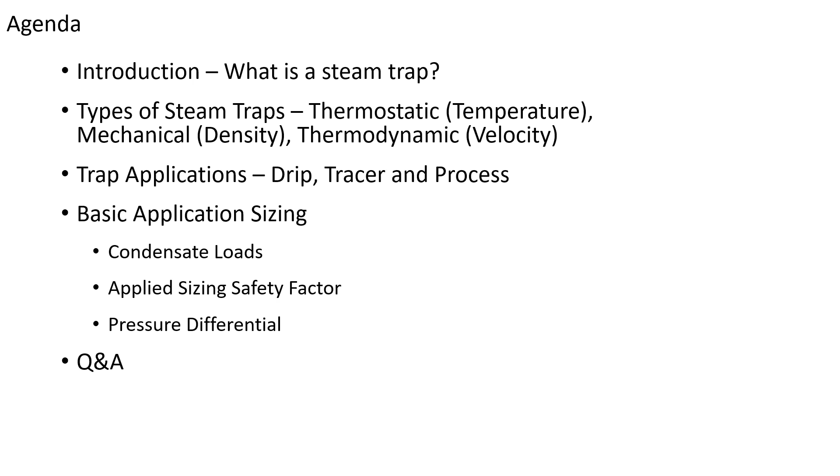The three common applications you'll find in industrial facilities are what we call drip, tracer, and process applications. Then within each area of that steam system—the drip, the tracer, and the process—we'll look a little bit at sizing. And then we're going to save some time at the end for question and answers.

Okay, so in a steam system, you might expect there to be just steam in the pipe, but actually there's several fluids and byproducts that have to be addressed. Obviously, steam is the main fluid you want in your piping network and process. It is the heating medium that has the largest amount of heat per pound mass of various utility fluids, so it's desirable to have that steam space occupied only by steam to be most efficient.

But as a byproduct of a steam system, you're also going to have condensate, which is just the steam that has given up its latent heat and condensed back into a liquid phase. That condensate is a valuable byproduct though. It still retains some energy in terms of sensible heat, and it is basically chemically treated and slightly purified water. So as a byproduct, you want to recycle that back to the boiler as best you can. The most efficient steam systems will have as close to 100% condensate return as they possibly can. That's never a perfect scenario, but it's something to strive for.

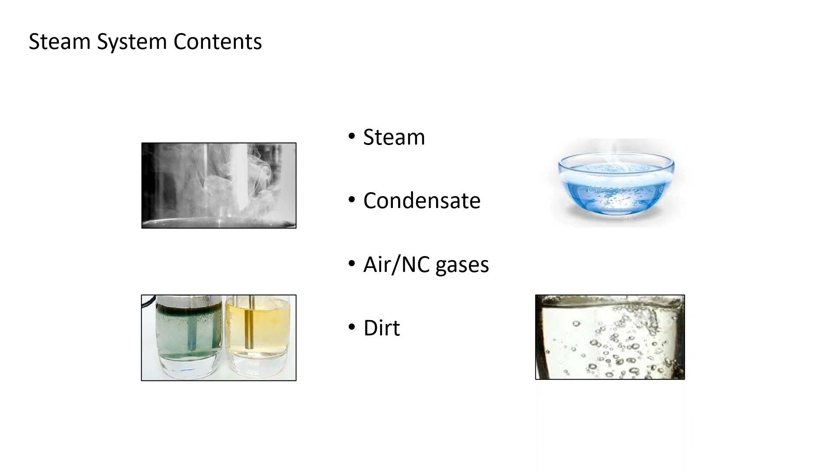But as far as the steam trap goes, you really have to think of it as nothing more than an automatic valve. And the automatic valve has to work based on positive pressure drop. There's some misconceptions in the marketplace that one particular type of trap by its operation will push condensate better than another. Really, all traps will push condensate. It's just dependent on the inlet pressure to the steam trap being higher than the outlet pressure outside of the steam trap. As long as that positive pressure differential exists, condensate will flow.

In a steam system, compared to, let's say, a hydronic system, you don't always have that positive differential, as we'll see. So that automatic valve in the steam trap differentiates between steam and condensate, and steam and non-condensable gases. It'll do that based on temperature differences, density differences between a gas and a liquid, or velocity. The speed with which a fluid will flow through a pipe or orifice will vary depending on whether it's a gas, which would be higher velocity, or a liquid, which would tend to be slower velocity.

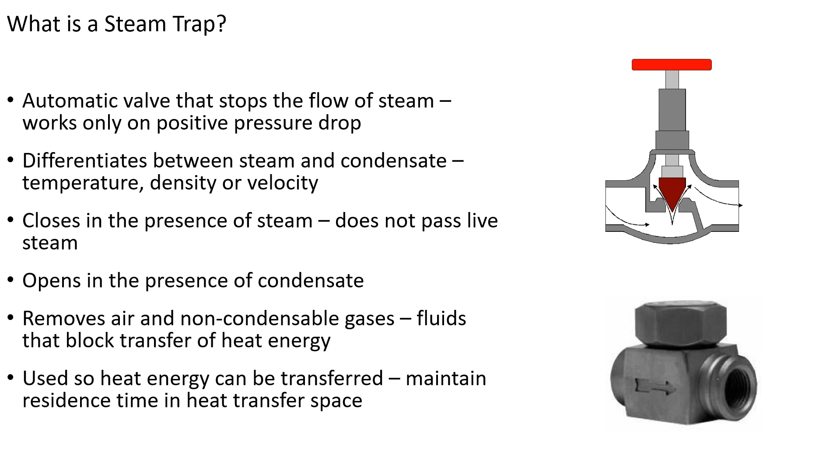The broad categories I mentioned earlier: a thermostatic steam trap operates on a temperature difference. Mechanical types of traps work on a density or level control type of difference between steam and condensate. And thermodynamic is a broad term covering many different types of traps, like impulse traps, but they're all basically working on a velocity principle. We'll look at that in further detail.

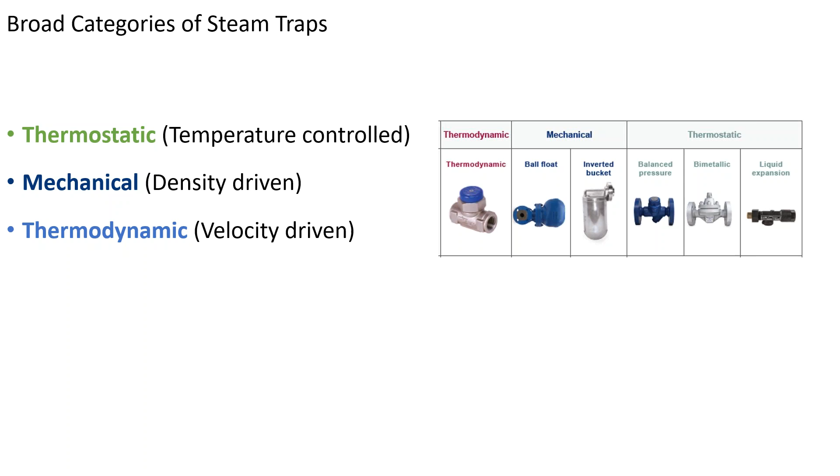We're going to start off with the thermostatic trap. It's probably one of the earliest types of traps ever manufactured, back in the late 1800s, early 1900s. These thermostatic traps work on the temperature difference between steam as a gas and condensate as a liquid.

Everyone knows that the saturated steam curve will give you, for any given steam pressure, a corresponding steam temperature. Directly at condensation, the condensate and the live steam occupying the same space will have that same temperature. So these traps, in order to hold back live steam, have to be able to sense a slightly lower temperature and operate at a slightly lower temperature than the saturation steam curve.

They do that by either a capsule, a bellows fill, or bimetal plates, which is over here on the bimetallic trap. All of those will sense a temperature cooler than live steam and will tend to close the trap off prior to reaching that live steam temperature.

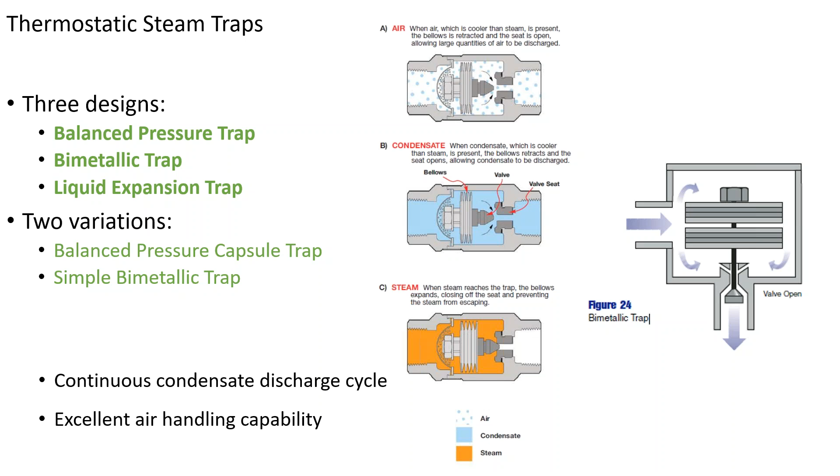Liquid expansion is just one of the specialty types of traps in the thermostatic family. In this case, there's a liquid-filled bellows, but that's on the downstream side of the valve head and seat assembly, and that thermostatic bellows is exposed to atmospheric temperature. So this type of trap will only operate at or below 212 degrees, so you'd expect it to back up a fair amount of condensate into the system. But that's okay, especially if you're looking for a crude type of temperature control device.

Let's say you have an outdoor storage tank filled with water, maybe a fire protection tank, and you just want a steam coil in the bottom to keep it from freezing. This type of trap can be set to discharge condensate at, say, 150 degrees or 120 degrees, giving you a crude form of temperature control on the storage tank to keep it from freezing. It has all the same characteristics as other thermostatic traps—wide open on startup, venting air, non-condensables, and cold condensate freely.

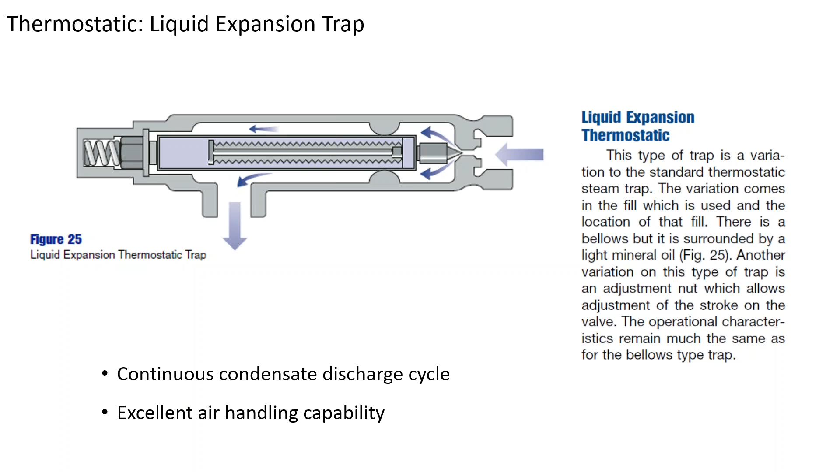I talked about the saturated steam curve, and this is the relationship you need to understand with thermostatic traps: they will always operate at some temperature below saturation. So condensate will be discharging somewhere below the saturated steam curve, and therefore backing up some condensate towards the system. The actual delta T will vary by trap manufacturer.

Some manufacturers use what they call a near-to-steam temperature profile, which is, for the most part, primarily distilled water inside a capsule. That gives it a boiling point very close to your live steam temperature, so it tends to back up less condensate. In other cases, they'll use an alcohol and water blend, which will drop that 212 degree boiling point at atmospheric pressure down to maybe 20 or 30 degrees below any given saturation temperature. Again, that's not necessarily a bad thing as long as you understand that's how the trap operates.

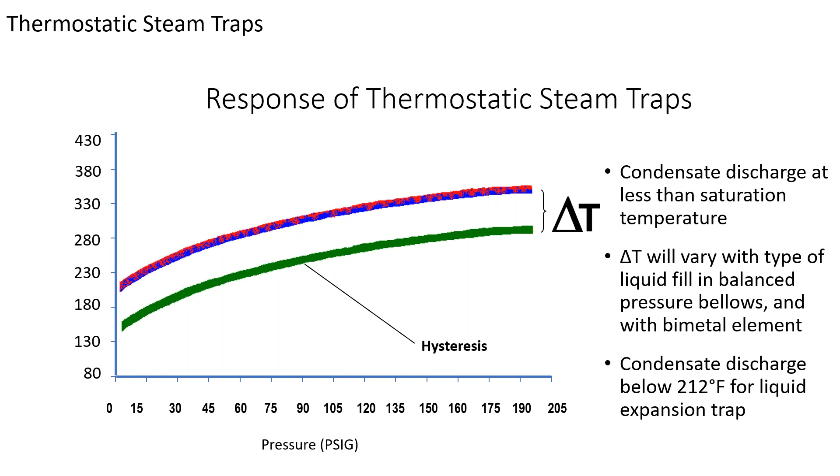So we're going to move to the mechanical traps. Again, these work on the density difference principle—steam as a gas is much lighter than condensate as a liquid, obviously. Inside these products, you're going to get more or less level control, so there's some sort of component that provides buoyancy. That component is attached to a lever arm and a pivot point, and on that lever arm is a valve head, which closes off on a valve seat.

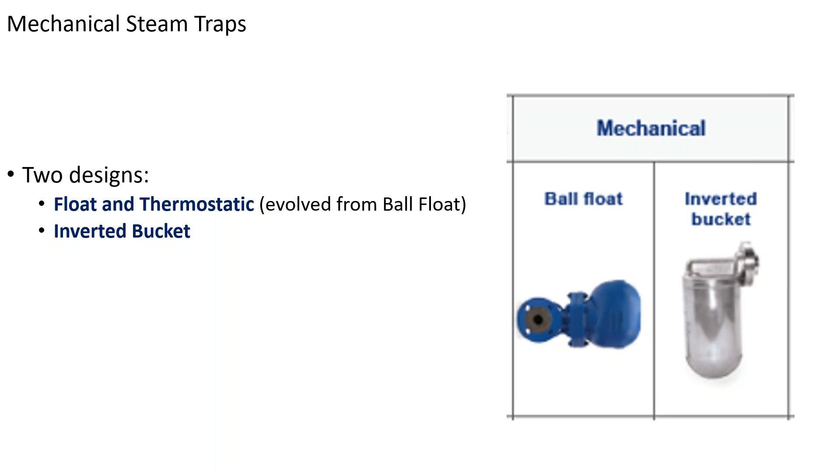The presence of condensate is then an essential point in getting the trap to open and close.

The first one we'll look at is the inverted bucket steam trap. This is a very basic trap. It uses an upside down bucket, or coffee can if you will, attached to a lever arm, again with the valve head on it. That upside down bucket provides a pocket where gas can cause the bucket to have buoyancy when surrounded by liquid, allowing that bucket to float upwards towards the top of the trap. By floating upwards, the valve head is pushed up against the seat, and that shuts the trap off.

So the valve head and seat are up at the top. Flow would come in down through the bottom of the bucket, and then flow out through the top of the trap and out the outlet side.

Steam as a gas obviously will float the bucket, since it has a lighter density than condensate. But in the same respect, air and non-condensable gases will float the bucket too. The problem with air and non-condensable gases is they're non-condensable, so all things being equal, if the bucket were to float up with air and close the trap off, the trap would then just lock closed and never open again.

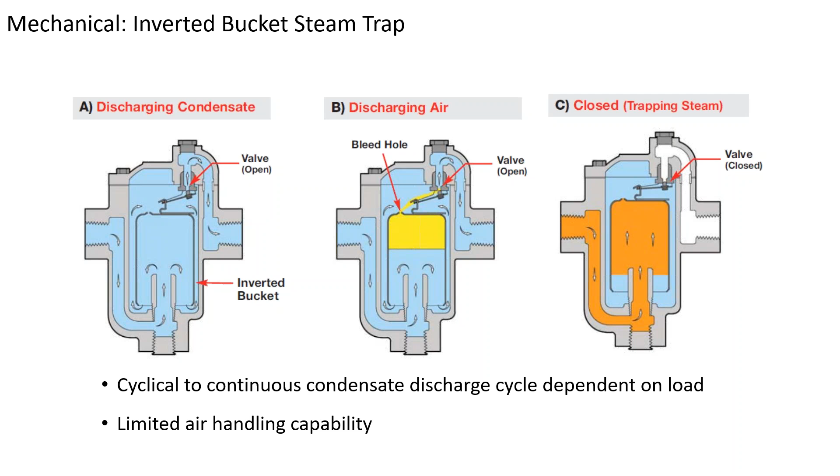The second type of density operated trap is called a float and thermostatic steam trap, or float operated. In this case, there's a sealed stainless steel ball float attached to a lever arm, which has the valve head on it and a pivot point. The buoyancy of that float on the liquid level pulls the valve head off its seat and back onto it, so it opens and closes at the same time.

Most trap manufacturers rate the capacity of a float and thermostatic trap strictly on the orifice size of the float mechanism. So the rated capacity in any manufacturer's table will be based on the float mechanism itself.

The interesting part of an F&T trap is the fact that there's a T in the name, and there is a thermostatic, temperature sensitive, secondary orifice built into the trap body. That orifice is intended for just an air vent and possibly cold condensate startup. So this trap combines actually two traps in one: the float mechanism is your primary discharge point, and the air vent is for startup conditions. Anytime you have a startup condition where air and non-condensable gases are present and cold condensate is present from just a warm-up of the mass of metal, you have basically two orifices to allow all those fluids to discharge through.

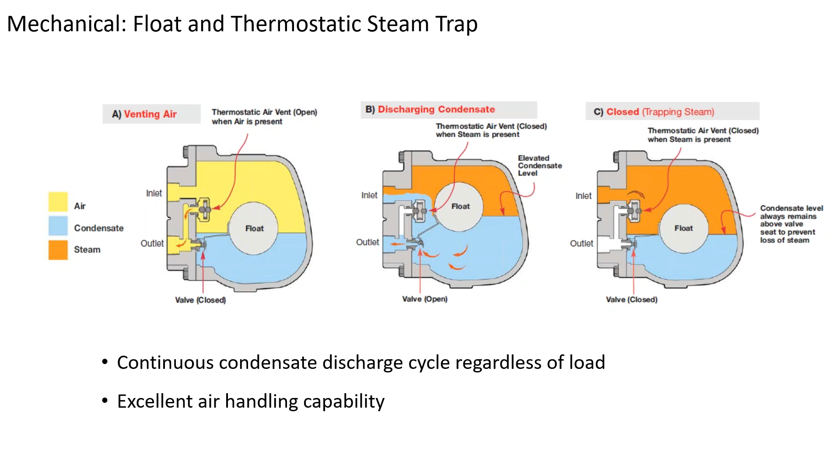Looking again at the saturated steam curve, since both of these traps are working on an interface between the steam and the gas and the condensate, they're going to be discharging condensate virtually at steam temperatures. So there should be little to no backup condensate back towards the steam system when using a density style trap.

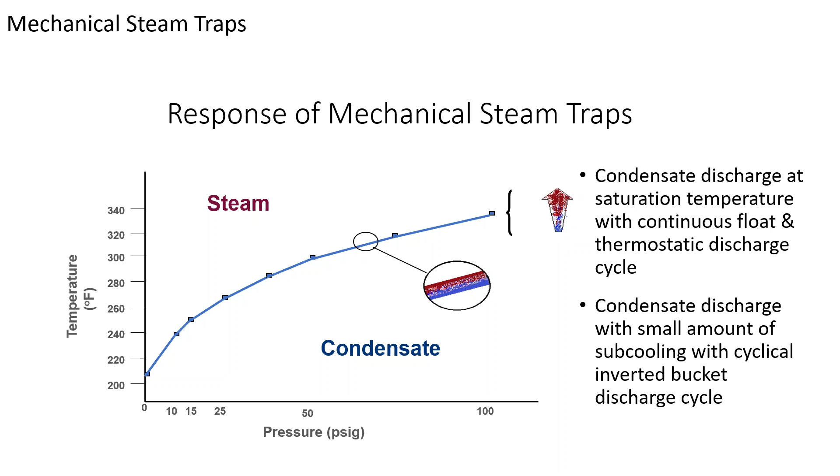The last trap type we'll look at is the thermodynamic steam trap. Depending on the manufacturer, these are made in all different types of orientations and configurations, without strainers, with strainers, what have you. But in general, they're all working with one moving part, which is a flat stainless steel disc that moves up and down off the seats in the body of the trap.

The principle of operation here with a thermodynamic trap is velocity based. The trap is sensing the difference in the speed of flow of gases over a surface compared to liquid over the same surface. This principle is called Bernoulli's theorem, and it's the principle that creates lift in an airplane wing. The velocity of air passing over the top of the wing flows faster than the bottom, and that faster velocity creates a low pressure zone, lifting the wing. The same principle occurs here with the bottom side of the disk.

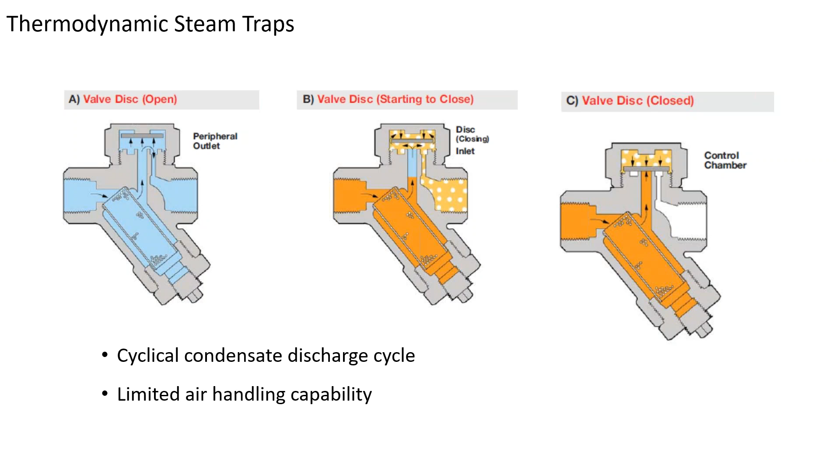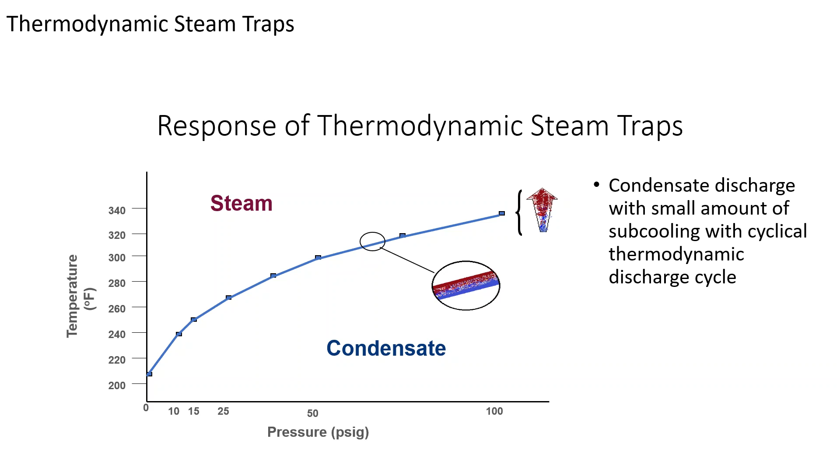Looking again at the saturated steam curve for a thermodynamic trap, it's going to be discharging maybe 2 degrees below saturation temperature. There's always going to be a little bit of backup behind a thermodynamic trap. As soon as the pressure drop occurs inside the throat, you'll always get flashing, so that hot condensate will flash. That tends to close the trap off before live steam reaches it. So there's always going to be a little bit of subcooling, about 2 degrees, but it's going to be what we would consider a hot discharge trap.

So that slide summarizes the characteristics. We use two characteristics to kind of describe the trap.

The amount it subcools, or the amount of temperature difference it's going to operate below saturation, and its ability to handle air and non-condensable gases.

And if you look at the chart here, you've got the basic trap types: thermodynamic at the top, balanced pressure, bimetallic and liquid expansion, float thermostatic and inverted bucket at the bottom. And it gives you the usual discharge patterns.

Blast action, so the thermodynamic trap, for example, is definitely a cyclical open and closed type of operation. You would expect then a small amount of condensate backup.

Balanced pressure thermostatic, on very light loads, will tend to cycle on and off because the time delay it takes to lose temperature will allow condensate to back up, and it'll blast out and then cycle back off.

On heavier loads, it'll be more or less a continuous dribble, as would be the bimetallic and the liquid expansion thermostatic traps. They would be continuous dribble in operation.

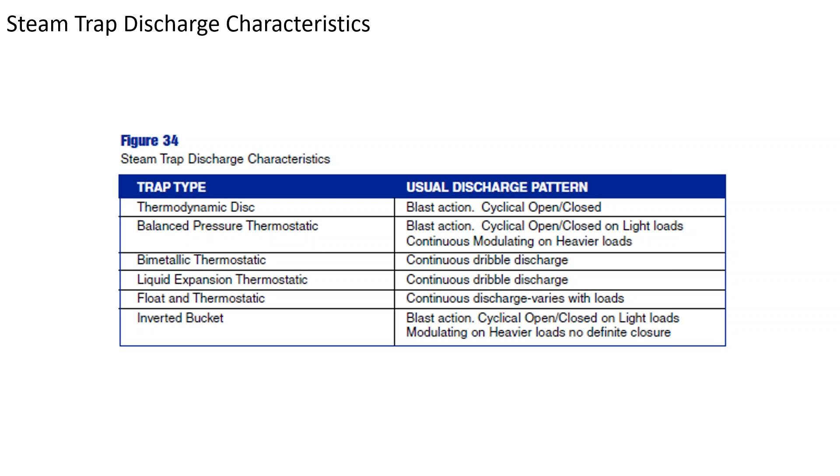Okay, so now we're going to look at applications real quick. Unfortunately, it would be great if there was one universal type of steam trap that could work in every application. Sadly, that's not really possible. Different operating conditions, different load conditions, different piping arrangements dictate that there's no one solution to every application.

So what we're going to look at here is what the application is going to require the steam trap to do. And then at the end, I'm going to bring together what the trap's characteristics are and what the application characteristics are and marry the two together, so that gives you some sort of guidance as to what type of trap might work best in what application.

So, steam main drips—these are common applications in every steam distribution system. You have to be able to drain the condensate out of a steam main for energy efficiency reasons and for safety reasons. I don't know if any of you have been around a steam main when it has experienced water hammer—it's not a very comfortable situation when the pipe's jumping off its supports. It can be very dangerous. So you need to maintain as dry a line as practical in a steam distribution system.

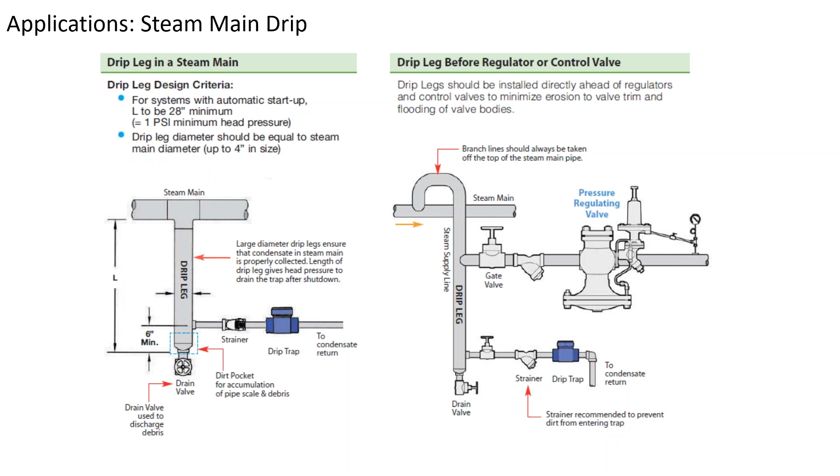So most of the time you have to do what's called a supervised startup. For safety purposes more than anything else, you need to go around and open up those drain valves and allow that cold startup condensate and air and non-condensables to pass to waste through those drain valves, allowing some pressure to build up in the steam main. Then go back and close those drain valves and allow the trap to take over the job of clearing the condensate. That's what's called the supervised startup, and by far the safer way to start up a steam distribution system - and again, the way most systems are piped, the more practical way to avoid water hammer.

These two charts give you a comparison for a startup condition and a running load condition for a given steam main. If you look at it, we're looking at an 8-inch diameter pipe at 100 psi. To start that 8-inch pipe up, you have to bring the mass of metal up to 338 degrees - that's the temperature of 100-pound steam. You have to raise the temperature of that entire piping network to that point. We're predicting about 100 pounds of condensate per hour per 100 feet of linear run of pipe. So if you're doing an automatic startup, you need to size the trap for that kind of condensate load, 100 pounds an hour per 100 feet. So if your drip pockets are every 200 feet, you would double that - the steam trap would have to handle 200 pounds an hour.

At the bottom chart is the same 8-inch pipe at 100 psi, but now everything's up to temperature and warmed up, and now it's what we call a running load condition.

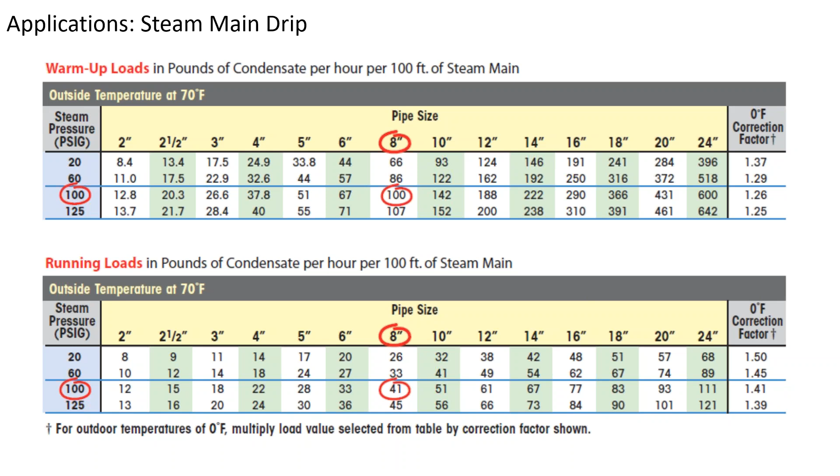The one thing you don't want to do is if you have a 2-inch main and you make a 2-inch pocket, you don't want to elbow into a 2-inch steam trap. I can guarantee you that the trap's not going to last you very long in service. You do not line size steam specialty products, generally speaking. So you wouldn't do that with a pressure reducing valve or a control valve. You don't do it with a trap, which is an automatic valve in itself. Same rules would apply.

The second one is what we consider steam tracing. That's an industrial practice for freeze protection or product protection, to keep products in outdoor piping from solidifying. The best analogy in food or pharmaceutical applications would be steam in place requirements, where you're sterilizing product transfer lines or sterilizing in place reactor vessels, things of that nature. So in these cases, you're looking to achieve a certain temperature on the product side, or in sterilization, say 121 degrees Celsius, so you can sterilize in place piping networks.

These kind of conditions, you're looking at primarily thermostatic traps or thermodynamic traps. If you were working in an asphalt plant or a sulfur plant in a heavy industrial complex, those products will set up well above 250, 300 degrees, so you want to have a steam tracer or a steam jacket that's completely full of steam. You don't want any potential for condensate to back up. You might want to consider, in a critical application like that, a thermodynamic trap.

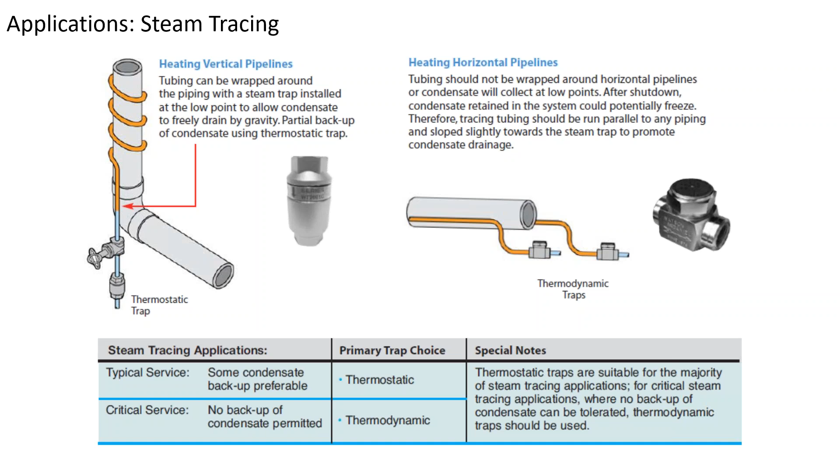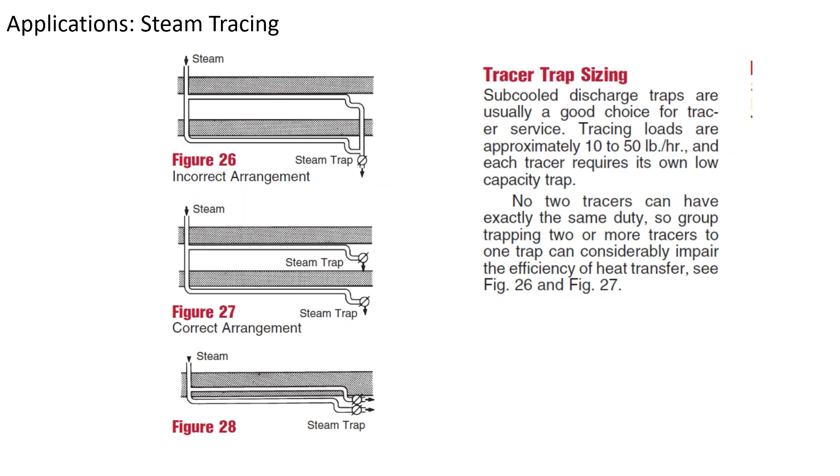For tracers, the main thing is you want to keep them individually trapped. The top picture, figure 26, shows two individual tracers trapped by one trap, a process we call gang trapping. It's not recommended, since there's always a pressure difference between the two circuits.

For tracing applications, if you're doing industrial work, you can start to look at manifolds for the supply and collection of condensate. In these cases, you get an opportunity to clean up your piping network. It won't have so much of a spaghetti look, with traps just hanging in air.

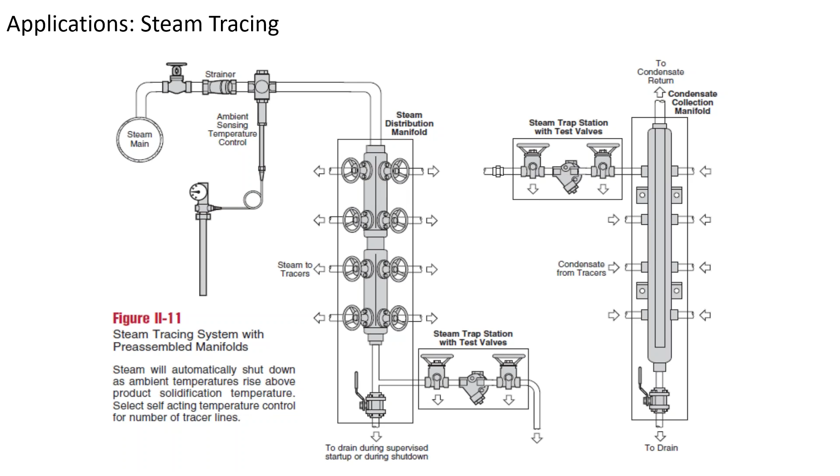This is what we were talking about earlier with the question about universal traps. These are typical trap stations offered by most manufacturers. They can be flanged or threaded, but in most cases you have inlet and outlet isolation, inlet bypass so you can drain upstream while still isolating the trap, and the ability to blow down for testing or blow down built-in strainers. As the picture shows, the trap module has a 2-bolt connection to the trap station.

So you can put thermodynamic, thermostatic, or float thermostatic traps—any of the different types would universally bolt to the connector. The advantage is a nice compact installation that eliminates a lot of leakage points. A conventional trap set, especially with threaded joints, has connections at the top that are potential leak points, which you don't have with the manufactured trap station.

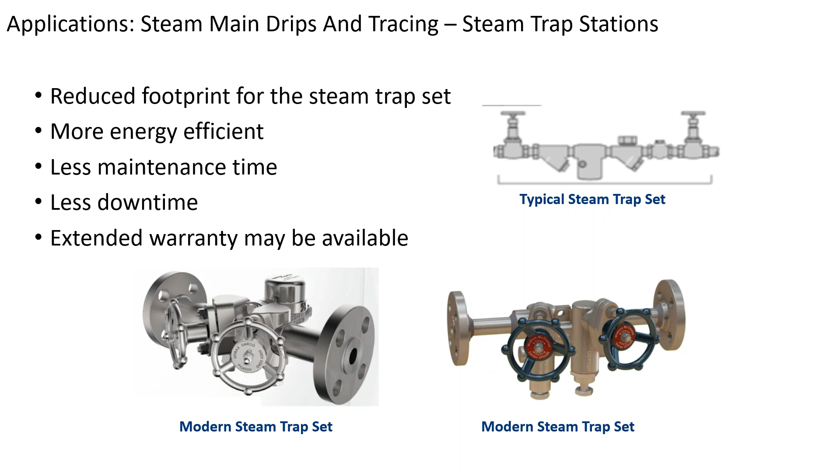Finally, with applications for process equipment, this is where you want the steam to condense and give up its latent heat to the process. Whether you're cooking something, heating air, or heating water, this is where you want the steam to purposely give up its latent heat.

By and large, these are all controlled by temperature, pressure, or maybe flow on the secondary side. So there's always a steam control valve on the inlet going into the space, and then a barrier for heat transfer from the hot side to the cold side.

In these applications, it's most important to have condensate drain out of the steam trap by gravity. These tend to be either batch or continuous operations, but they're going to have different load demands on the process side, so the steam condensate loads will vary all over the place.

With the surface area of the heat exchangers generally being constant in most applications, the only thing that can vary to give you heat transfer is the temperature of the steam. And when you vary the steam temperature, you vary the steam pressure. Whereas in a drip application you have constant pressure—say a 100-pound steam main always has 100 psi on the inlet of the trap.

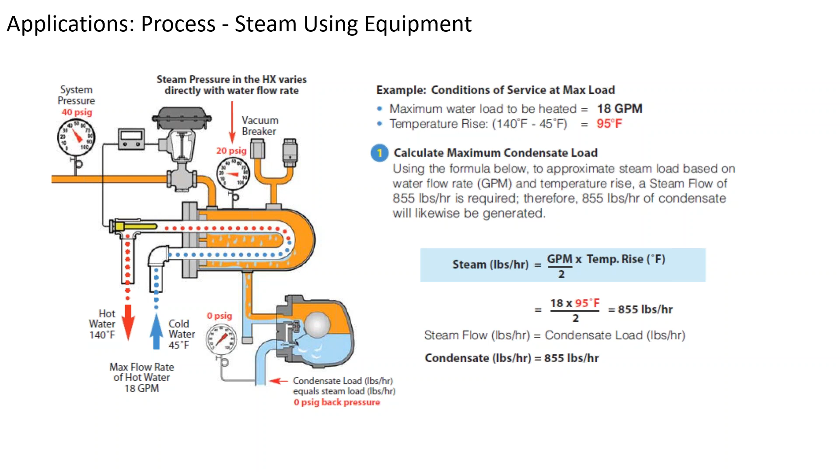Most manufacturers publish additional rule of thumb formulas, and also some specific formulas. If you want to get into the engineering units and do an exact calculation, the exact formulas can be used. In most cases you'll notice a true latent heat value underneath the equations, so you can take the actual steam pressure and its corresponding latent heat and use that in the equation to get a more precise steam flow calculation. Whatever goes in as steam comes out as condensate, so steam in, condensate out gives you the same flow rate.

Safety factors will vary by manufacturer, but most recommendations are for a 2 to 3 times safety factor.

So if you have an exchanger, like in the example before, rated for 855 pounds an hour, and we look at the safety factor loads—let's take it as a storage heater with a 2 times safety factor—you would multiply the 855 by 2 and then look for a steam trap in a catalog that has that capacity.